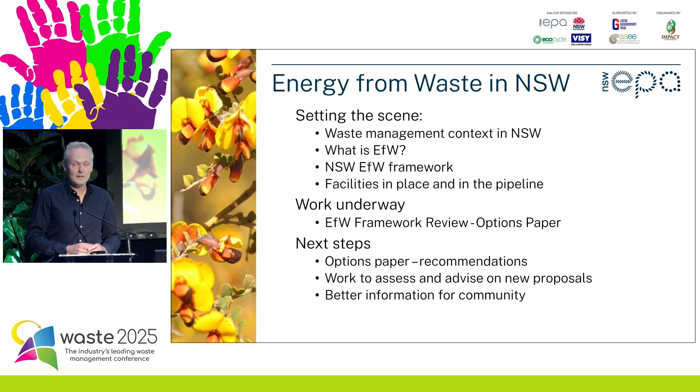A quick slide here on what we mean by energy from waste when we talk about it in New South Wales. Gail mentioned this morning we all have different views on this in the panel discussion. Broadly it covers a system that takes residual waste - that is, waste left over after recyclable materials have been mostly removed - and uses a thermal process such as incineration, pyrolysis, or some other thermal process to recover the embodied energy from that material. Energy can be recovered in various forms, such as heat or as a fuel, as Gail mentioned, which can then be used to generate electricity or used in machinery, vehicles, industrial processes and the like.

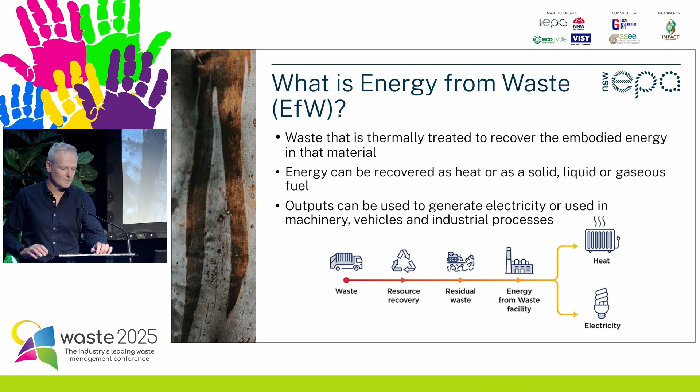Now on to something a little broader about waste management in New South Wales. Since I first started working in the waste space for the EPA around 15 years ago, I've seen a number of really big shifts in how we think about and manage our waste. I haven't been to a Coffs conference for about 10 years because I've been off doing other things, but I've noticed the conversation has changed coming here this time. Some people are actually positive about the levy, which is great.

The things I've seen in terms of shifts have included some really groundbreaking initiatives over the last 10 or 15 years - as I said, Waste Less, Recycle More, lots of funding going into resource recovery, Return and Earn, our container deposit scheme, yes, the waste levy, I think, is a positive, and things like community recycling centres - we've got over 100 of them around the state now, helping to keep the nastier stuff out of our waste streams.

We currently recycle about two-thirds of our waste here in New South Wales. There's a little asterisk on that - maybe it's 73% if you joined the panel discussion this morning - but about two-thirds, and we continue to press forward with a number of circular economy reforms such as FOGO and the recent Product Lifecycle Responsibility Act for batteries. So really pushing forward with our waste management.

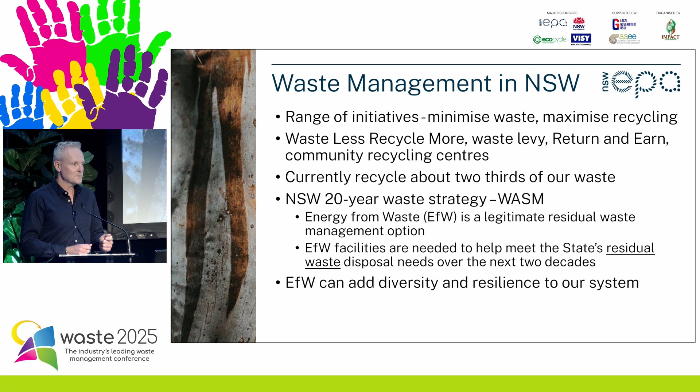So, a few slides here and a bit of a recap of the energy from waste policy and our regulatory framework in New South Wales.

Firstly, as I mentioned, energy from waste is supported as a residual waste management option, but only approved types and in approved areas according to our policy and legislation. It's critical that we closely manage where and how energy from waste activities can occur to ensure we protect our communities and the environment, and to ensure it doesn't curtail other circular economy initiatives into the future. So we need to keep that in mind.

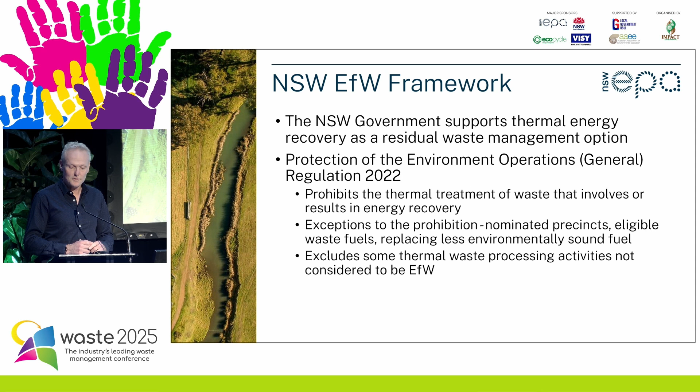Our POEO general regulation achieves this by broadly prohibiting energy from waste, but then making exceptions such as for facilities within identified precincts or those burning certain eligible fuels, and excluding other activities. These requirements are all set out in our New South Wales Energy from Waste policy statement.

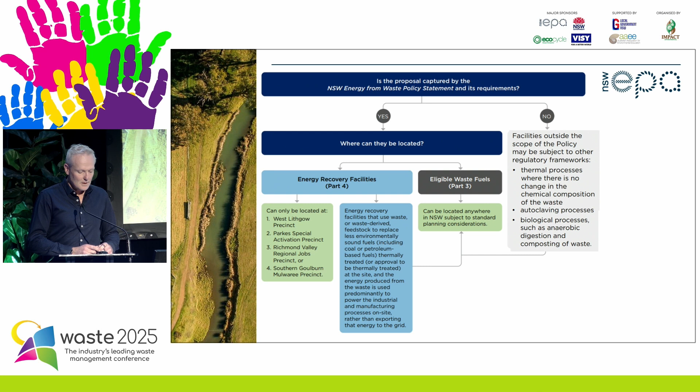Moving further to the centre left, in the big blue box there, we have activities that can also be carried out anywhere that use waste-derived fuels to replace a less environmentally sound fuel such as coal in an existing industrial or manufacturing facility. And finally, on the left, we have the energy recovery facilities that don't meet any of the other exclusions or requirements, so must be carried out in an identified precinct. Presently, these are West Lithgow, Parkes, Richmond Valley, and Southern Goulburn Mulwaree. A little more on the requirements for the facilities in these areas in a moment.

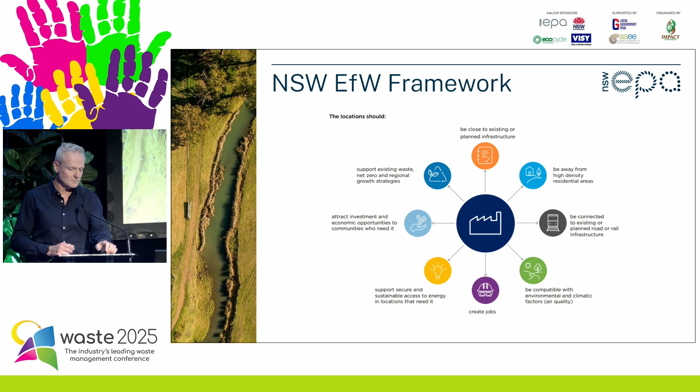So just to wrap up this recap on our existing framework, I'll quickly run through the requirements for those facilities in precincts and replacing fuels. Our policy statement sets out that technical criteria such as time and temperature for the combustion process, emission standards and continuous monitoring and reporting requirements for those key pollutants that are generated by these facilities, minimum thermal efficiency requirements - i.e. that's a proportion of energy that you need to recover - and minimum upstream resource recovery rates for in-feed fuels.

New South Wales, of course, has a comprehensive planning assessment framework that requires a thorough assessment by proponents and includes review by key agencies such as us, the EPA, and also requires comprehensive consultation as well.

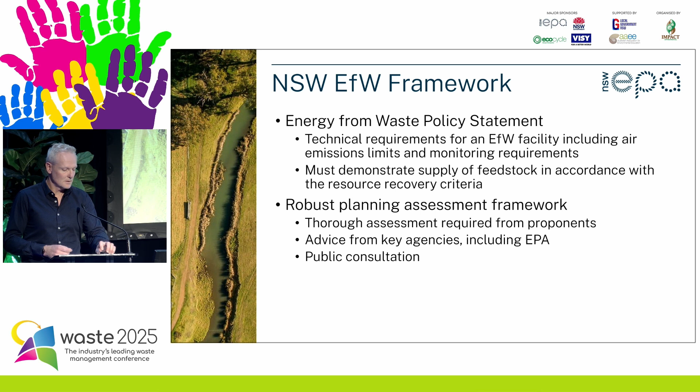Looking at the main current facilities and proposals in New South Wales, we have the Veolia Woodlawn Eco Precinct. The proposal is currently under assessment in our planning system, and that's up to 380,000 tonnes per year residual waste. Tribe Infrastructure Group also has a Parkes Energy Recovery Facility proposal that's not yet in our planning system.

So it's still in the early proposal stage, 600,000 tonnes estimated a year, and Andrew Smith from Tribe will be on a little later this afternoon in this session to talk about this one. We also have 2 operating facilities that were in place prior to the current framework coming into force in 2022, and which are therefore not subject to the requirements, but they do of course have comprehensive development consent and EPA licensing requirements that apply to them.

These are the Boral Cement Kiln in Berrima. This uses solid waste derived fuels such as residuals from construction and demolition waste, resource recovery facilities and processes. And the other one is Green Distillation Technologies out at Warren, which uses pyrolysis to recover carbon, oil and steel from waste tyres.

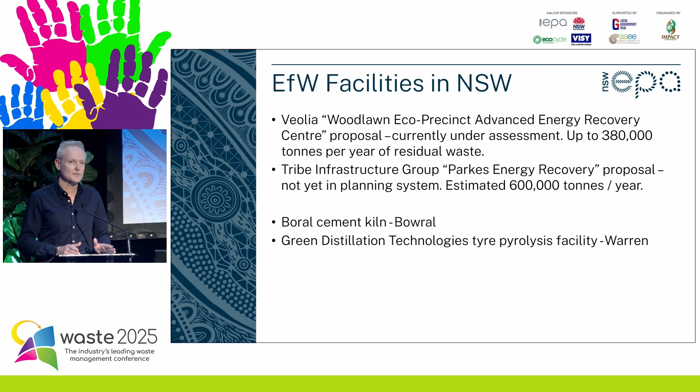So that's it for the recap. Onto more the current work we're doing.

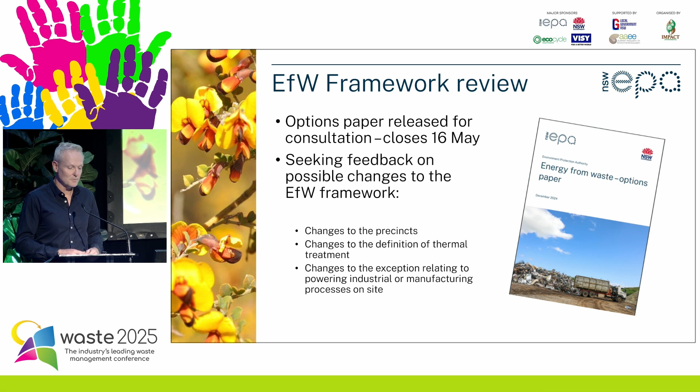The EPA has progressed a review of the Energy from Waste framework for the New South Wales Government. We've made some preliminary findings and identified potential changes to this framework. We are seeking feedback on these changes, and we released an options paper a couple of months ago, and it closes this Friday, on 16th of May. So if you're getting your comments together, get them in. The options paper outlines potential changes to the precincts, to the definition of thermal treatment, and to the exception relating to the replacement of fuels for powering industrial and manufacturing processes on site that I mentioned previously. I'll go through each of these in a little more detail now.

So for the precincts, we are consulting on several possible changes. Richmond Valley Council resolved back in November 2022 to pause its efforts to develop an energy from waste facility. We also don't have any current energy from waste proposals for this area, and we are therefore seeking feedback on the possible removal of the Richmond Valley precinct.

For West Lithgow, the original precinct map was revoked after Energy Australia at the time had an application in, but they withdrew that. However, we know there's renewed interest in the area of West Lithgow at the former Wallerawang Power Station, and we are seeking feedback as part of this consultation on extending the existing West Lithgow precinct out to include the Wallerawang site and gazetting a new map for that area.

We also have a potential opportunity for an energy from waste facility in the Hunter region at Tomago, and that's been identified through analysis commissioned by the EPA and considered against those principles for locations of energy from waste facilities I outlined earlier, and it may be suitable. We're therefore seeking feedback as part of this consultation on establishing a new energy from waste precinct for Tomago.

Finally, no changes are proposed to the Parkes Special Activation Precinct, where Tribe Infrastructure is working on a proposal, as I mentioned, nor the Southern Goulburn Mulwaree Precinct, where Veolia's proposed facility is undergoing that planning assessment.

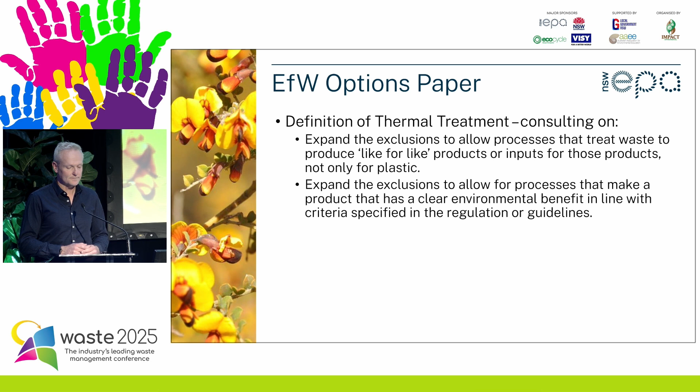The final change we're looking at and we're consulting on is the potential to expand the use of waste-derived fuels to replace other types of fuels used in or to power industrial or manufacturing processes at existing premises. So currently, as I mentioned before, the replacement of the fuels with waste-derived fuels is only permitted for existing facilities that are using coal or petroleum-based fuels.

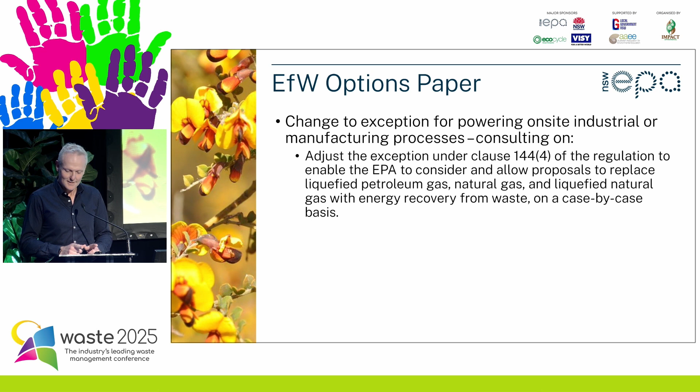We're seeking comment on whether the EPA should expand this exception to allow for existing facilities to replace LPG, liquefied petroleum gas, natural gas and liquefied natural gas with energy recovery from waste on a case-by-case basis where it results in a more environmentally sound outcome. I will note here that we've already received a lot of robust feedback on this item, which we will closely consider.

So to wrap things up, on to next steps. As noted, the consultation on our options paper closes this Friday, after which we'll be reviewing. We've had more than 250 submissions and deciding on a way forward. We'll also be continuing on with the important job of assessing and advising on these new energy from waste proposals as they come through the planning system to ensure the proposals are sound, but importantly that our assessments are timely and we're getting those done and getting out of people's way so they can run their facilities.

Finally, the significant interest we've seen in our consultation shows that people are engaged in and definitely care about energy from waste issues, particularly in their local areas. It is important they're able to access clear and factual information about it. This was raised again as a key issue in the panel discussion earlier today, and we are therefore developing better information for the community about energy from waste, including about the risks and how they're managed. So thanks for your time and your interest this afternoon. I'm done.

Thanks, Rob. Maybe we'll wait. If you've got questions, write them down or think of them. Or you want to... Yeah? I mixed it up. I said to Rob, we'll do questions straight away, but I think let's move it on so that you can be up here too and it's not just the other three.

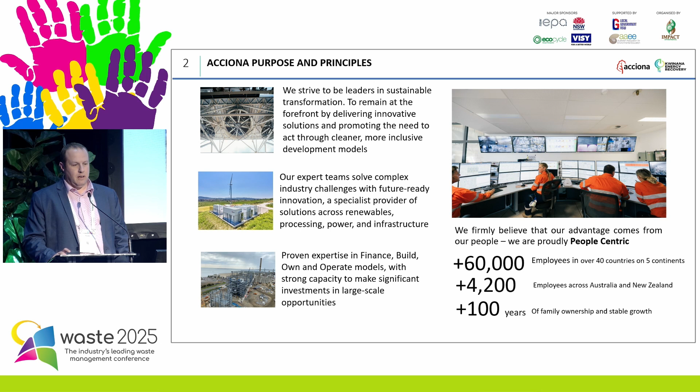In terms of how we do it, that's for us just as important as what it is that we do. We are a people-centric organisation. We believe in and we empower the teams of people to deliver projects. That's the way we do it. We challenge and we want them to innovate, and we lead from the front. We don't step back.

Many of you here today will probably have seen or be close to a project that we've delivered across all parts of the country. We've just put up a few examples of current and recent projects. The Western Harbour Tunnel, probably for those of you from Sydney will be aware of that, the new crossing. So that piece of infrastructure is ongoing now. The tunnel boring machines are being made, and they'll be moved from China to Australia later this year. Again, we've got water treatment, we've got transport solutions, energy solutions, including one of the largest wind farms in the country, along with desalination and energy distribution.

Back to the clicker problem again. There we go. Okay, so moving to Kwinana, probably what everyone's here to find out about.

So we are Australia's first operating energy recovery facility. We use proven technology to deliver safe, clean, and reliable resource recovery.

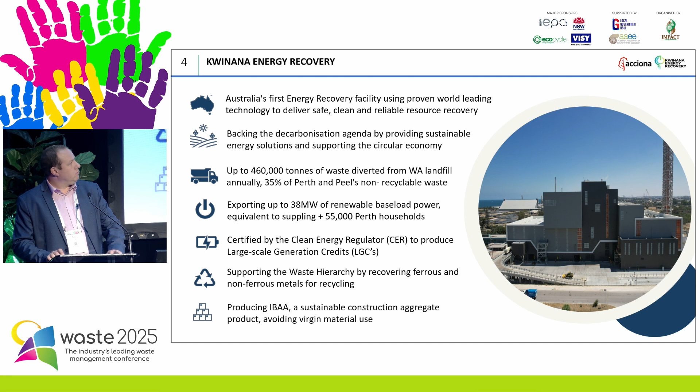So a few operating stats for what we're actually doing right here, right now. We are able to receive over 150 deliveries a day from our local authority and commercial partners, coming in every day. As many of you have seen, if you visited or seen any videos, we're moving waste around with the crane system that's moving over 6.5 tons at a time. This is a very large-scale process - we're feeding the grate, and we're processing between 17 and 35 tonne an hour, depending on the calorific value.

As we said, the furnace - we all know there's the magic 850 degrees for 2 seconds. We're typically running at well over 1,000 degrees, so we are in that very high range. That's not obviously what we guarantee, but that's the reality of what happens when we're processing this type of waste.

In order to support that process, we're using over 300,000 cubes an hour of air, and that's going up through the stack, which is 87 meters high. We are continuously monitoring all of the emissions - they're being recorded and provided to the regulator. We do what we say on the tin.

We have high-pressure steam going through to the turbine, that's turning over 5,500 RPM and generating power to the grid. And we're handling, in a year, over 100,000 tonne of bottom ash and 20,000 tonne of fly ash and APCR.

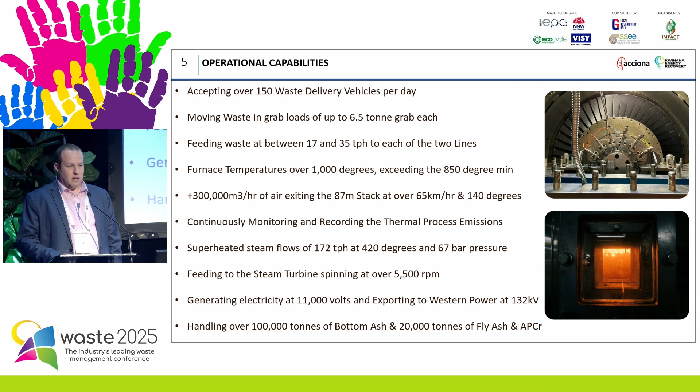So, what have we done so far? So far at Kwinana, up to the end of last month, we've diverted 114,000 tonnes of waste from landfill. Around about 85% of that is MSW from our local authority partners who have come in, with the remainder from our C&I suppliers. We've been monitoring the waste that's coming in, and we'll talk a bit about that in some of the lessons.

It's a really important stage of what differentiates us from other residual waste outcomes - the quality of the material that we need and the actions we need to take to understand and monitor that along the way, whether through CCTV or actually physically tipping waste out and going through it, because it's important to understand your feedstock.

We've also created over 19,500 tonnes of IBAA, and that material is now being reused. That material is, as we stand here right now, being put into the civils works that's finishing the Kwinana site, and we've been working with our partners in our supply chain to actually get a product now that is ready for market, and people in WA can use this material.

We've also recovered over 3,000 tonnes of ferrous and non-ferrous metal. The one thing that is sure is that our recycling isn't that great - there's a lot of containers, unfortunately, ending up in the red bin stream. We do find that, and that's just something there for people to take away. That is a lot of metal that would have otherwise ended up in landfill.

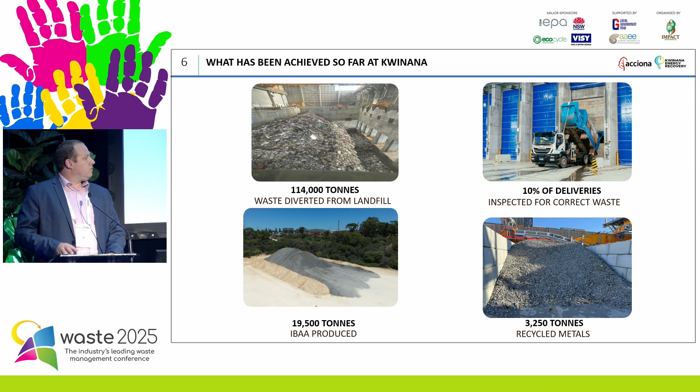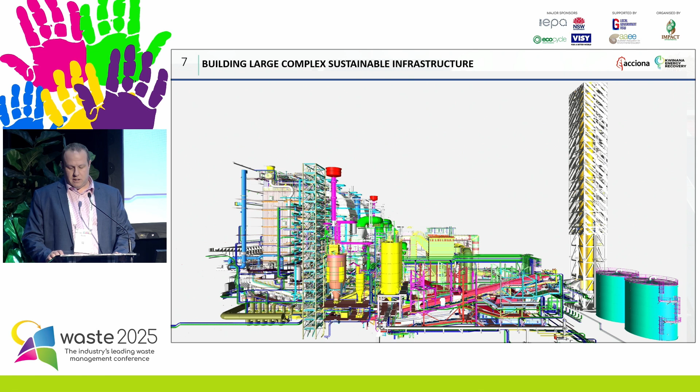So in terms of building Kwinana, I think everybody understands it's a complex process, a complex plant. Some of you may have visited, some may not. So we just wanted to take a minute to give people an understanding of the complexity of what we're dealing with. This is a shot from the 3D model, which shows every component, every pipe, wire, steel member, piece of equipment we've installed inside the Kwinana facility. I'm not going to talk through every single piece, but it gives everybody an idea of the complexity of what we're dealing with, and anybody who's visited the site will see that as well.

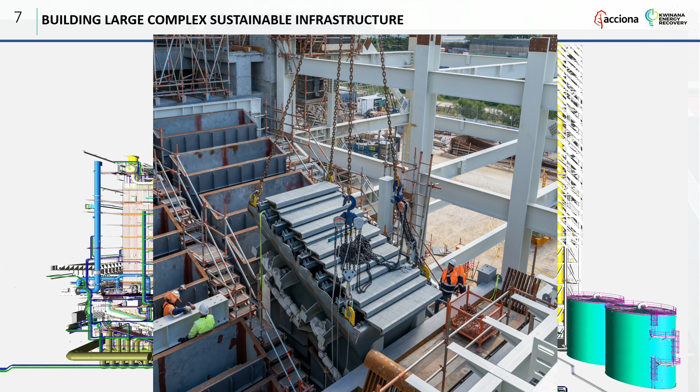And a few snapshots from the build. This was the grate being lifted in, in the early phase when we were actually lifting in the core pieces of equipment. And then later on, the key piece, the lifting of the steam drum, which sits right on top of the boiler, on the 17th floor, around 45 meters up in the air. And then finally, the last section of the stack, lifted in carrying modules from China, which were brought through the local port and then lifted into place here at Kwinana.

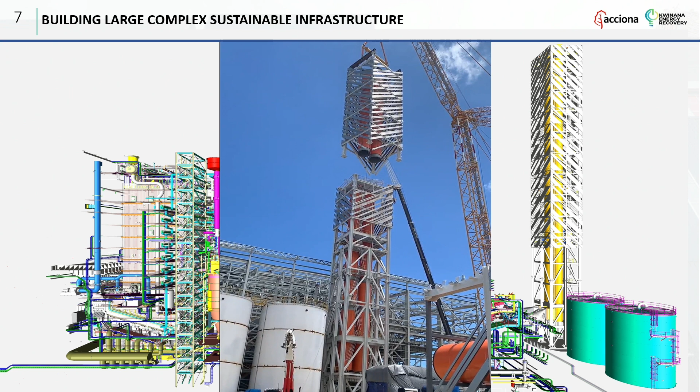So to try and help people understand what we're trying to do, to give some stats on it: there's over 475 kilometres of cabling on site. For those from WA, that's Perth to Albany as a cable, or roughly the altitude that the ISS orbits at.

From an effort point of view, we've expended over 3.5 million man-hours building the facility. We've carried out 26,500 inspection test records. On everything we install, we have to go through the quality systems to ensure that when we put it together, it's going to work in the right way.

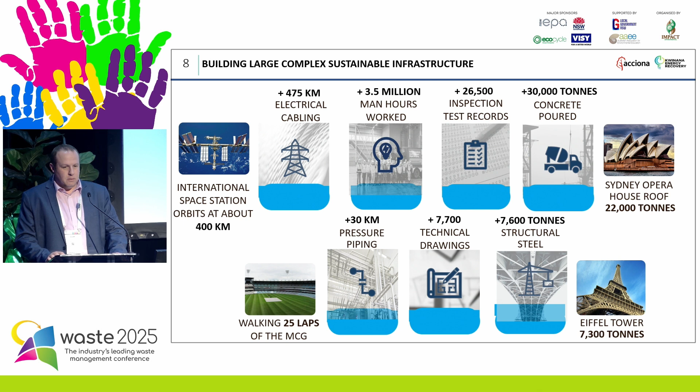We've installed over 30,000 tonnes of concrete, which is more than the Sydney Harbour Opera House roof, and we've installed 30 kilometres of pressurised piping — more than 25 laps around the MCG, or if you're from WA, that's from the Kwinana site out to Rottnest. We've got 7,700 technical drawings, all of which will need to be updated at the end to as-built, and over 7,600 tonnes of structural steel. So, pretty significant facility — again, more than what's going into the Eiffel Tower frame.

So I think the key thing a lot of people want to understand now is, what should we do? I know Craig introduced the COVID issue earlier, so I thank him for that. Yeah, probably not the best idea to do it during a pandemic — let's hope there's not one of those coming along anytime soon. But clearly it didn't help. There were a lot of things here that we all probably either know or should think about.

And yeah, we agree, safety must be the priority. But it isn't just a one-stop shop — this changes. When you start one of these facilities, you're on a green or brownfield site, and everyone's probably going down that path. By the time you finish commissioning, you're in an operating facility. There's a huge difference in the safety regimes you need at the start versus at the end, and you need a safety management system that can deal with that.

The next one is to focus on developing a long-term sustainable business. There was a lot of talk earlier about how we get these things going, and it isn't just about the initial capex. We're not delivering a project, we're delivering a business — a business that can run sustainably on its own for the next 25, 30, 35 years. That's the only way we'll provide a service to our customers. We're not here for a good time, we're here for a long time. And that is really, really important.

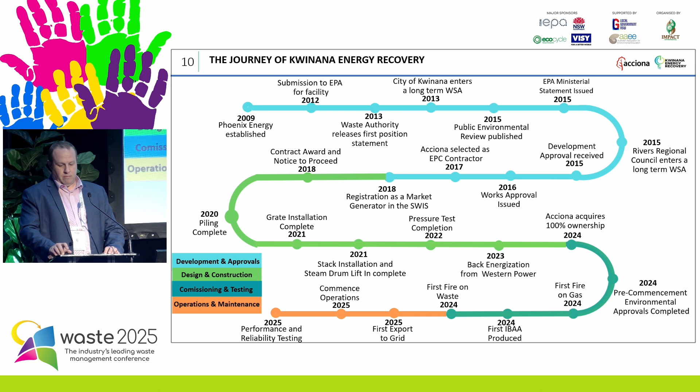We need someone to deal with the IBA. We need someone to deal with the APCR. We can't bury our heads in the sand and pretend it doesn't happen. So at the minute, we've got an outlet taking it to the Tellus facility at Sandy Ridge - that's a way of dealing with APCR.

We're not here to say it's the best way or the only way or the way we'll do it forever, but it is a way. We need a degree of oversight and certification. We need O&M, we need EPC, and we need funding. All of these pieces come together through, in this case, an SPV. Other people talked about other models for developing infrastructure projects, but we're here through an SPV, which is the Kwinana Energy Recovery project. Ultimately, we need to bring all of these stakeholders on the journey all the time, which is one hell of a long journey.

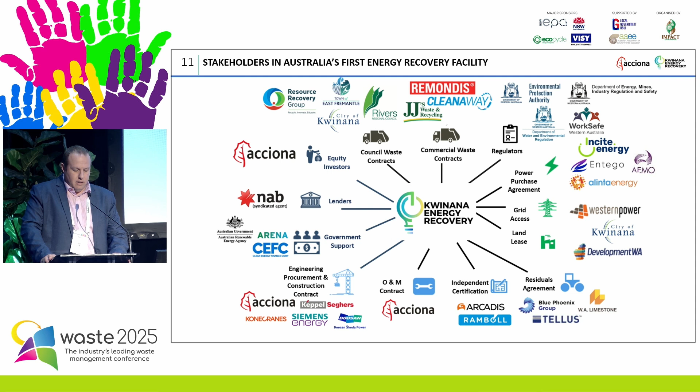The other key piece around how we do it is being in the community. The Kwinana facility is located in WA, in the Kwinana Strip, one of the most heavy industrial areas in WA. So we don't have some of the neighbour issues that other proponents are up against. But we do have a community we engage with, and local industry who we engage with, who we create issues for, and they create issues for us. We shouldn't shy away from those points. We should embrace them and understand how we impact each other so we can manage it in the best way possible.

We'll be developing a community education facility on site, supporting that education process, not just about energy recovery, but the whole journey. We're working with DWER in WA so that we align our education messages with the state's education messages and local authorities' education messages, so we go on this journey together. We end up with partnerships with universities around inspiring and supporting the next generation of people who want to understand what we do here. We leave a legacy of workforce who have gone through this process and understand it. We support our local community, through volunteering or sponsorship, to help them in their own journeys.

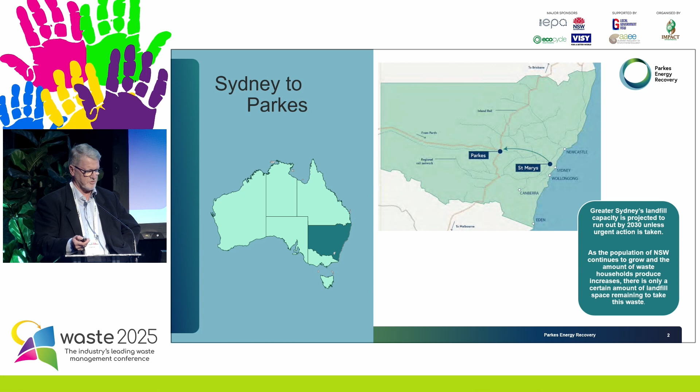We've heard about the landfill crisis, and this is one of the plants we're hoping to get online by 2030 — I'll show you a timeline later — maybe 31, depending how fast things move. It's already been a long journey, so hopefully it speeds up.

We started this with an expression of interest back in 2020. 17 groups responded to that proposal. They were then shortlisted for a non-binding offer, narrowed down to 3. Then came the binding offer and shortlisting, followed by another process called the BAFO, a best and final offer.

Then some elections got in the way, so we waited a few months for that, and then we negotiated for another year. Finally, we signed contracts the Friday before Christmas, which was lucky because then we got Christmas off, didn't have to work through that, but came back in January starting.

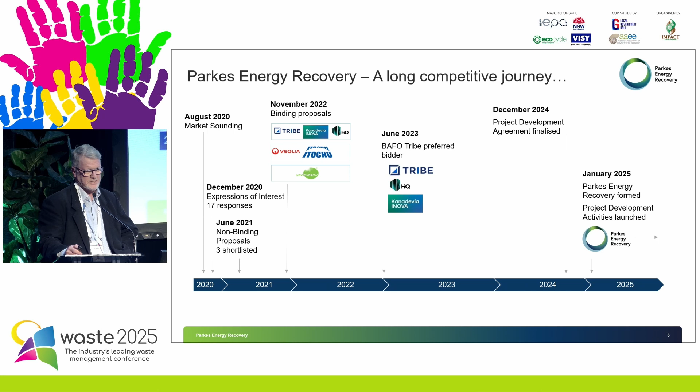So we've just kicked off the development process. We obviously have a long haul on these projects in New South Wales to do the environmental impact studies. So what are we going to do?

That is the Parkes region, you see the Parkes City there. The site is about 5 kilometres west of it in the Special Activation Precinct. The government, through its subdivision of the Department of Planning called Regional Growth Development Corporation, which is sort of our client for the SAP, owns the SAP. They've bought 4,600 acres out there, so it's a fairly big area. They've bought a lot of the properties, so there's big buffer zones.

There is a railway line running right past the site, which I'll show you a picture of in a minute. So the plan is we're going to be putting waste on rail and taking it out to Parkes in containers.

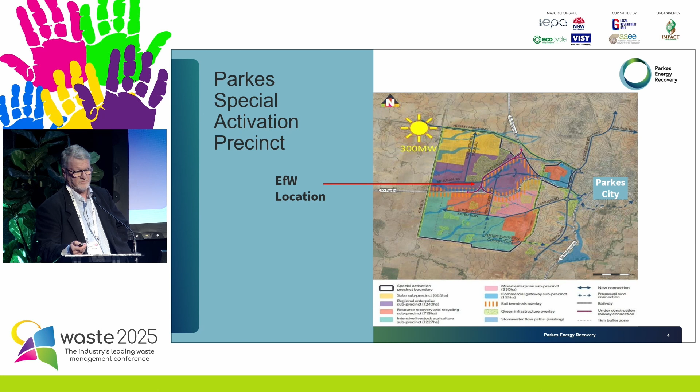Similar to what Veolia is doing at Woodlawn for the last 20 years. The facility out there, as you heard from the EPA, we're planning 600,000 tonnes minimum. We're looking at waste market studies at the moment and how much is in the market. There is a lot more than that, but we're going to sit that at, it'll be 2 lines.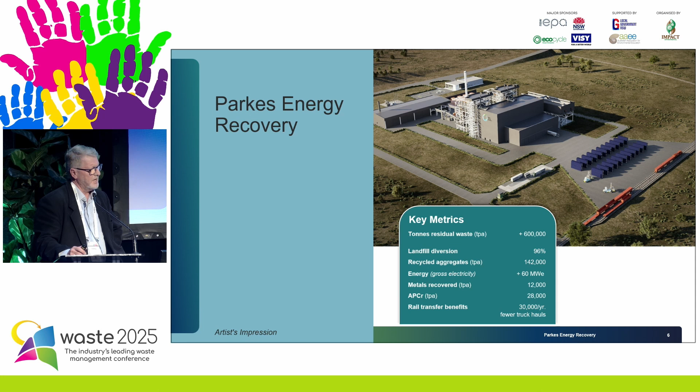We will hopefully achieve 96% diversion like Kwinana is. We'll have a bottom ash recycling facility, which is the building behind the stack there on site. It'll put out very similar amounts of electricity into the grid at Parkes. The SAP is building a substation for us, which is nice because we don't have to build that. And the usual other same volumes of metals recovered and APCRs. We may treat the APCRs on site, we're not sure yet.

That's the site, it's a very greenfield site. That's the old farmer's house there on the right. Just below is the big Pacific National Intermodal Terminal. So we could take the containers in there and run them down, or we could even take from the railway line there a sort of a spur line straight into the facility, into the tipping hall, which saves an awful lot of handling and problems with odours straight in. You don't want to be opening trucks, opening up containers outside it.

So it's a big site, it's 30 hectares. The site in Kwinana, I think, and the Rockingham one is only 8 to 10 hectares. So way too much land, but it's good to have the buffers. I will point out the tree line at the bottom there, the bottom half actually goes underwater in a flood. So while we're renting 30 hectares, we're only going to get 20. We tried to move it, they said no.

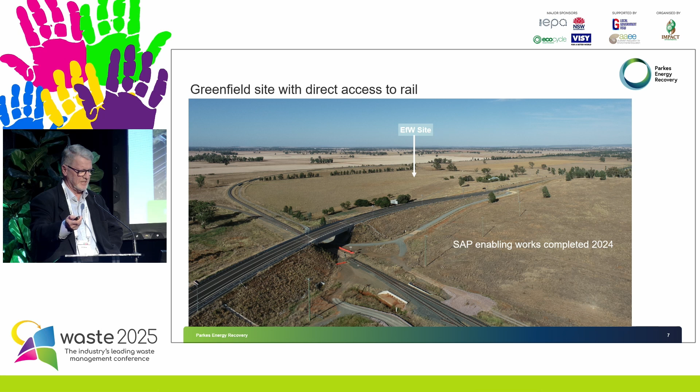The other part of this project, and we'll get onto why it's complicated with the planning, is we have to build a couple of intermodal transfer stations in Sydney. We have one site already selected at St Mary's. We're looking at another site that's in the north. For people not from Sydney, that's in the northwest, and we're looking at the southeast near Botany Bay or somewhere slightly in the inner west there to try and capture most of the Sydney area.

So these transfer stations are not your usual transfer stations for normal waste from truck to truck. We will compact the waste into these containers to try and maximise the delivery. We know Veolia gets about 31 tonnes in the containers, hopefully we get a bit more than that. Veolia has a limit on their containers at the other end where they have to put it on a road and haul it up to their landfill. We don't have to do that at the other end, so we're hoping to compact as much into them as we can to make it more efficient.

We'll have big loaders that put it on top of the train. This was a slide we put together ages ago to show you the trucks will pick it up in the morning, drop it off, the first cut at 11. We will then haul it out of probably the St Mary's transfer station, like around midnight. It's hard to pull it out during the day due to the Sydney train network, so they take priority. There will be slots all night long, and that's when most of the freight trains roll out of Sydney. So it'll be up in Parkes by probably, I think it's an 11-hour trip. That's our train system.

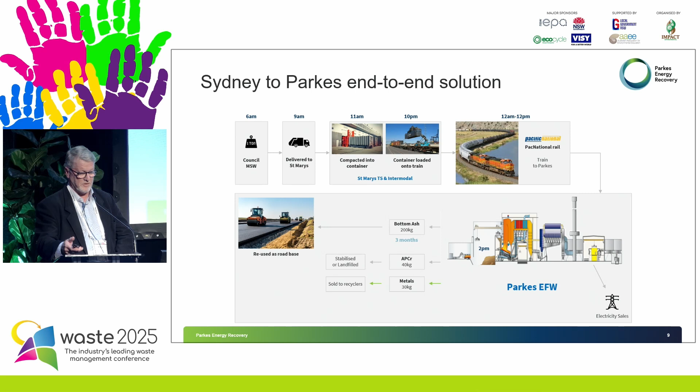For the people out there in Sydney, or the councils especially, that's the location of the St Mary's site. I put a 45-minute isochrone for a truck there to show you how far you can get. We're probably going to look at 30 minutes - I think that's more reasonable - but when you finish a run, you've got to try and get to the St Mary's transfer station, and then it'll be put on the train. It's pretty convenient.

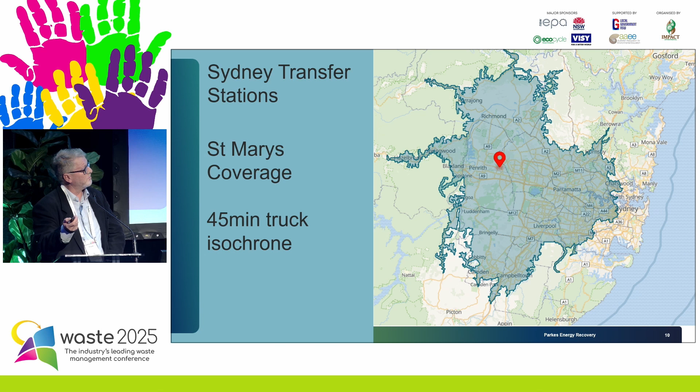That's a fairly extensive coverage to make sure that all councils will have an opportunity to deliver waste to this facility. We also have a southeastern one - it's not decided yet, but that was placed near the Veolia one at Banks Meadow to see how far that goes, and that's 45 minutes covering the North Shore and the southwest. So pretty good coverage - most councils will be able to accommodate the end of their runs and put it into our transfer station if that happens down the track on your tenders.

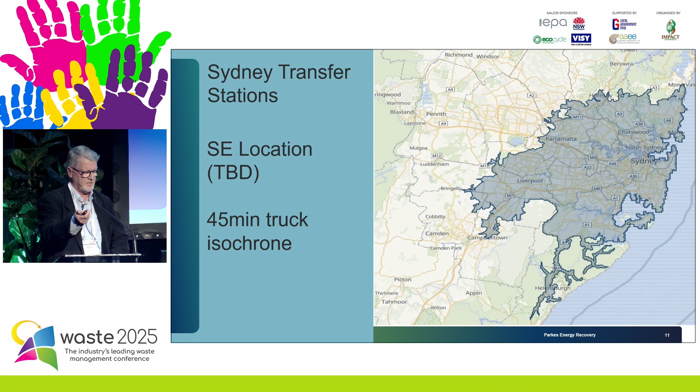We have been developing the St Mary's look. That's a 3D render - you can see the train in the background. The site we've selected is on Lee Holm Road there. It's a high quality site with our partners in the consortium. It's 3 or 4 hectares with plenty of room. The train line adjoins the back of the site.

Waste collection trucks will flow in there, it'll be compacted inside the shed, the hall there, and then it'll be just lifted straight out the back fence onto about a 350 metre front of an intermodal terminal owned by Pac National. Loading trains will take an hour, two hours - unloading them is quick, the train haulage is slow. So we're looking at 350,000 tonnes through that, which is quite a lot for a transfer station.

What are we doing? We kicked off in January, February. We've started stakeholder management - I think that's our first cab off the rank. We've been out to Parkes. We're starting the St Mary's stakeholder management, explaining to people what's happening. There's a few groups in Parkes that are asking why it's here, and there's a few questions that we have to answer.

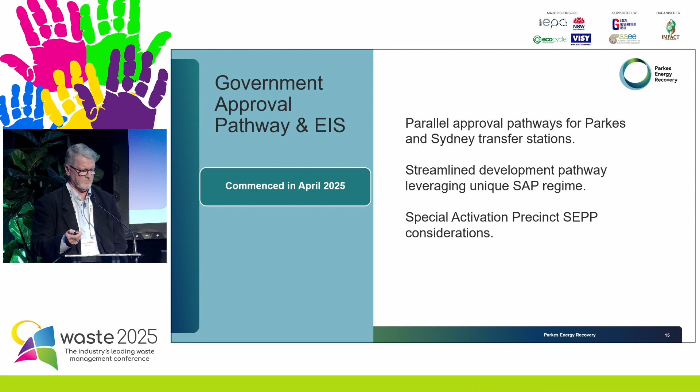Initial chats with Department of Planning have been very positive, we can run these two at once, but you understand we can't have one without the other. Good to have a burner out there going, but if you can't get the waste to it, it's not going to work very well, and vice versa. So that's going to be a tricky one to put forward. They'll have to be juggled together, with different interactions on both, hopefully not two different pathways to get it forward. We'll work through that. I don't think that's been done before in a waste to energy plant, so we'll just see how we go. We're keeping in close contact with planning and EPA, with many discussions happening at the moment.

For the contracts for councils, we've already had some discussions with some councils, and some are very interested. These contracts are similar to what we instigated in the Rockingham plant in Perth those years ago. It's a waste arising model, so there's no guarantee on tonnage. I'm not going to ask you to give us all your tonnage or you have to pay. We just ask that what is in the red bin is given to us. I think they'll like that.

So if you need to take stuff out of the red bin, for example FOGO coming in the future might take waste volume out of our red bin, we're okay with that. You can keep processing different technologies that come up in the future to try and reduce your volume going to landfill.

We do look for long-term, we're going to need long-term contracts to finance this thing. 10 years is probably the minimum, we prefer 15 or so. So you have to look at whether you can do that. I know they're not the norm in New South Wales, but we managed to do them in Perth all those years ago, and they are working quite well.

Most councils realise that, and it also gives you a good long-term view of what your costs are going to be. You won't have to risk a landfill levy, which may go up more than CPI, we don't know. So those risks, I think, are worth looking at for this type of facility.

There's 600,000 tonnes of capacity at the moment. We are looking for waste, and we're going to be looking for waste over the next 2 years. We'll have to have a certain amount of contracts in place before financial close. Our financial close is due in early 2027, so we will be needing to look at council tenders and processes between now and then.

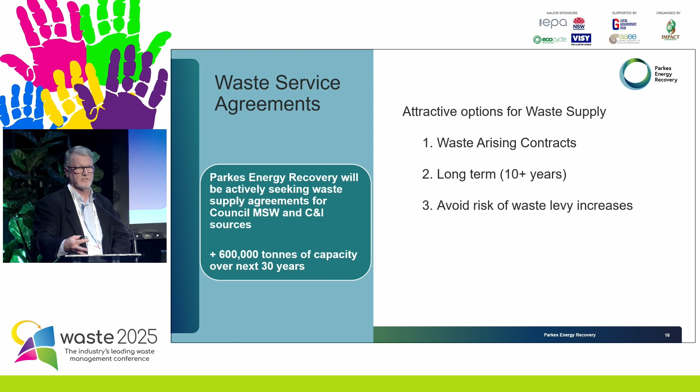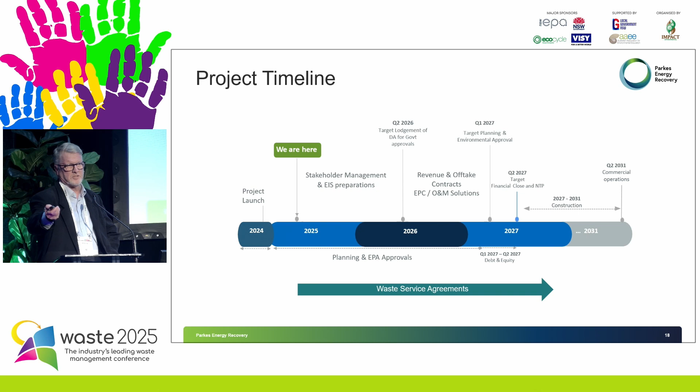So you start looking at your tenders for that. That's the sort of timeline you're going to have to be looking at and lock it in to try and get waste disposal at this facility. That's it for me. Hopefully that's a brief explanation of what's happening and understanding it.